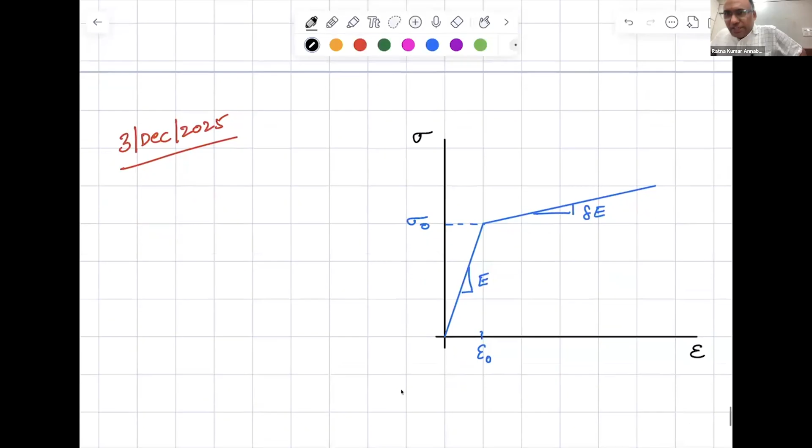Okay, so now yesterday we were looking at this elastic linear hardening model, right?

Now, if you look at this, let us say you are talking about a stress at this point, the equation of line OAB. So equation of line AB can be written as sigma minus sigma naught divided by epsilon minus epsilon naught is equal to delta times E.

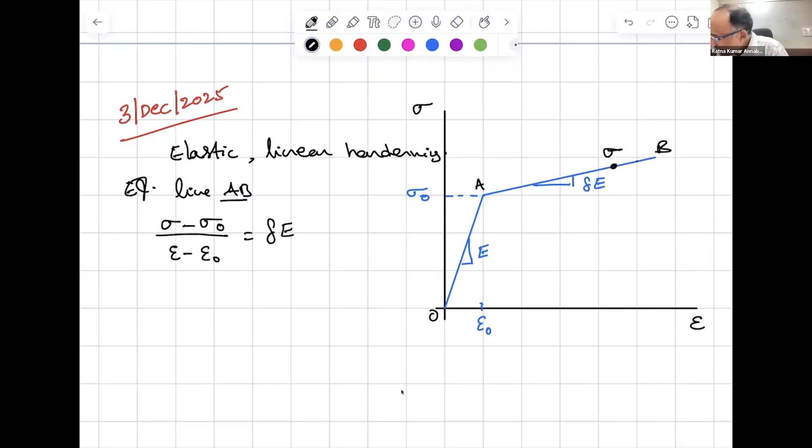What this delta is, some constant between 0 and 1. If it is 0, then this slant line will be elastic perfectly plastic. So it will be less than 1 because the slope, if it is equal to 1, then this will be, sorry.

If it is equal to 1, so this will be 0 comma 1, less than 1, the delta value. If it is equal to 1, it will be same as E. If it is less than 1, so you can see that the slope of this line is smaller than E. That is why it is delta times E.

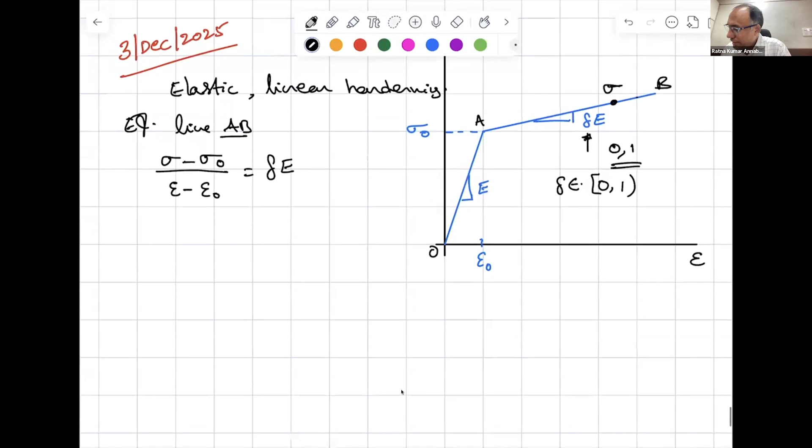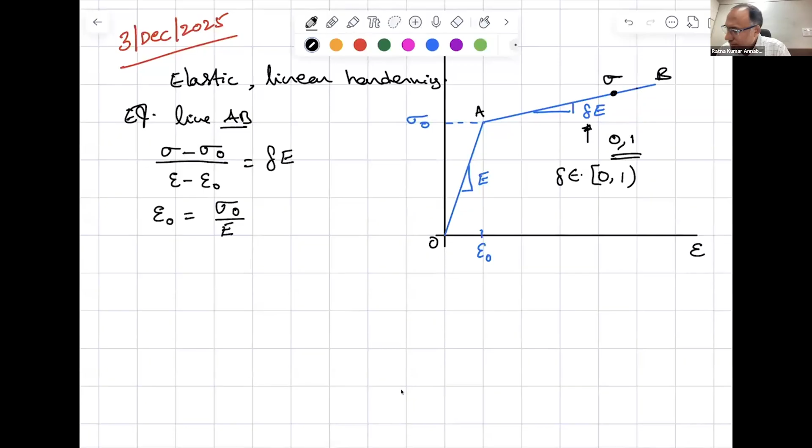Okay, now you can write this relationship as, you can also write epsilon naught is equal to sigma naught by E. Can I do that? Because this is my epsilon naught.

Now, if you have to write the generic expression for the constitutive relation, I can write sigma is equal to E times epsilon if sigma is less than or equal to sigma naught. And now I have to write sigma if sigma is greater than or equal to sigma naught.

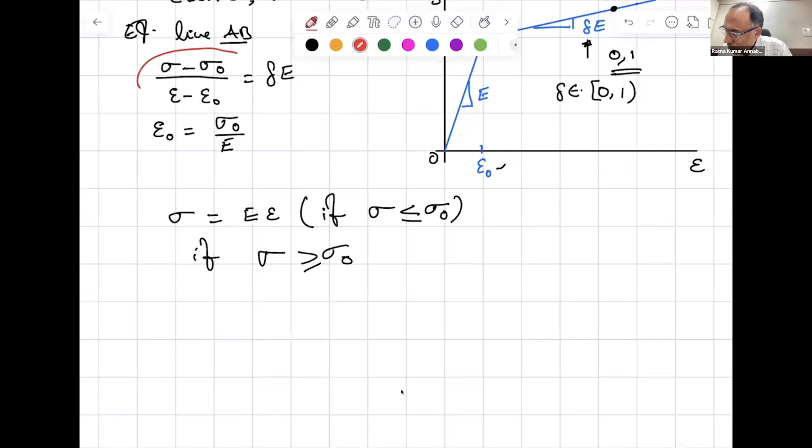This is what is to be satisfied. So sigma minus sigma naught is equal to delta E times epsilon minus epsilon naught. Can I do that? That implies sigma is equal to sigma naught plus delta E times epsilon minus delta E times epsilon naught. And what is E times epsilon naught? E times epsilon naught is sigma naught.

So that can be written as sigma naught into 1 minus delta plus delta E times epsilon. That is my stress if sigma is greater than or equal to sigma naught. Right? There are two conditions.

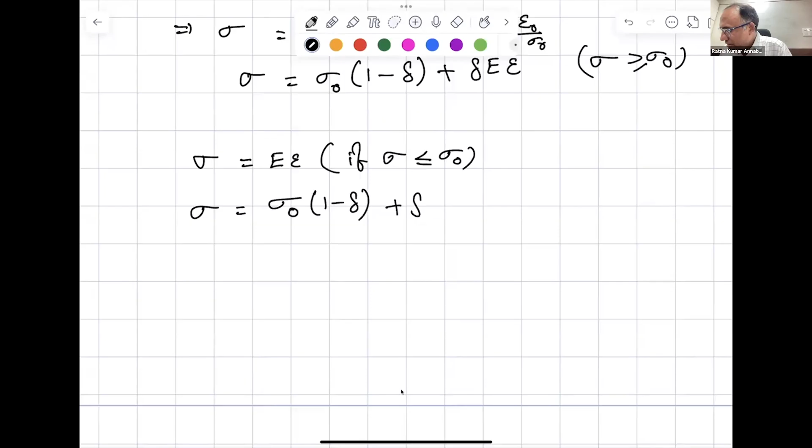So I can now put them together. Sigma is equal to E times epsilon if sigma is less than or equal to sigma naught. Sigma is equal to sigma naught into 1 minus delta plus delta E times epsilon if sigma is greater than or equal to sigma naught.

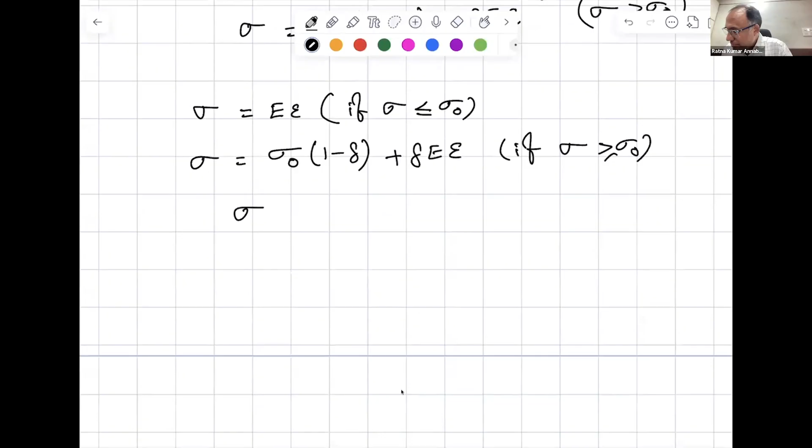And sometimes, as we have said, we will write the equation. You can write the constitutive relation as sigma as a function of epsilon, or epsilon as some function of sigma. Both of them are the constitutive relations that describe the behavior of the material.

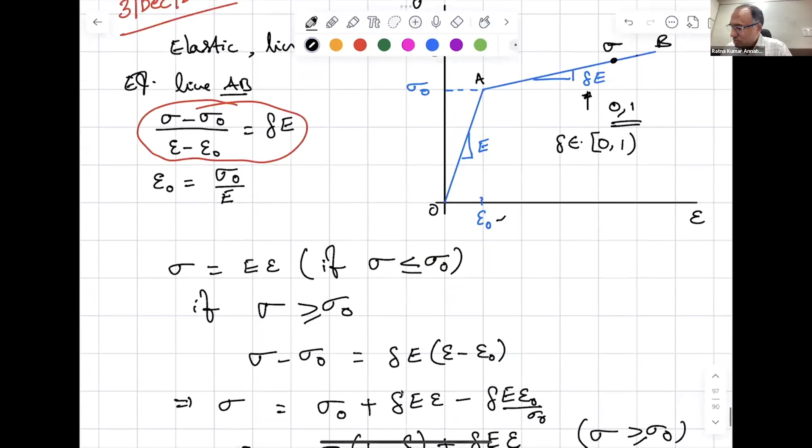So you can also write from this expression, sigma minus sigma naught by epsilon minus epsilon naught is equal to delta E. That implies epsilon minus epsilon naught is equal to sigma minus sigma naught by delta E. That implies epsilon is equal to epsilon naught plus sigma minus sigma naught by delta E.

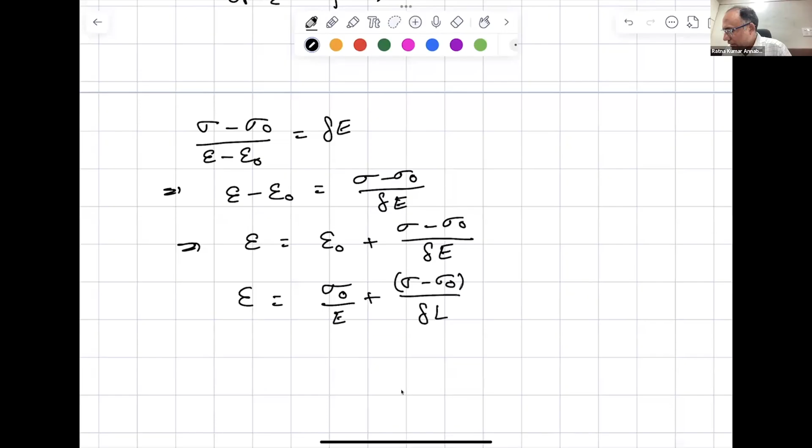But we know what epsilon naught is. Epsilon naught is sigma naught by E plus sigma minus sigma naught by delta E. Now, if you look at this equation, this is like I am writing epsilon as a function of sigma. If you look at these two equations, then I am writing sigma as a function of epsilon. They are interchangeable, completely interchangeable.

I think yesterday we had difficulty seeing how this equation has come about, right? Is that clear now?

Sir, one follow-up question. In the sigma equation, instead of sigma naught, since we are writing it in terms of epsilon, should we need to substitute for sigma naught in terms of E epsilon?

But sigma naught is a material property, right? Sigma naught and E are material properties, they are constants for your material. You could write, say, sigma naught is equal to E times epsilon naught. Again, epsilon naught is what? It is not epsilon, right? It is yield strain.

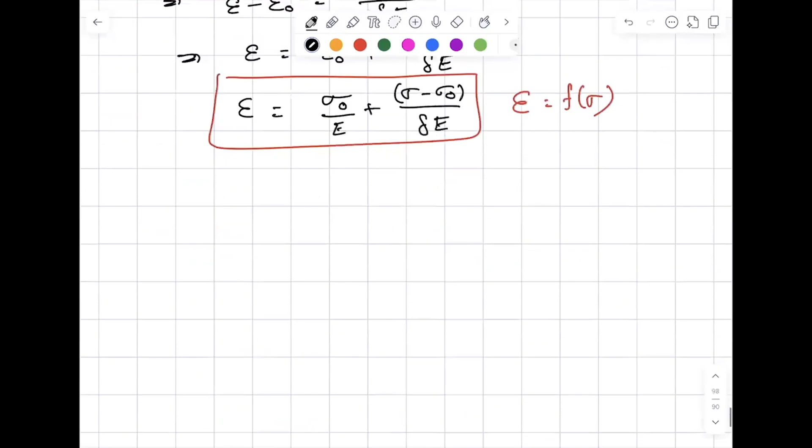If you slightly go up, can you slightly go up, sir? No, sir, slightly come down, sir.

Here, sigma is equal to sigma naught into 1 minus delta plus delta E into epsilon. We are converting epsilon naught to epsilon. How is it happening, sir?

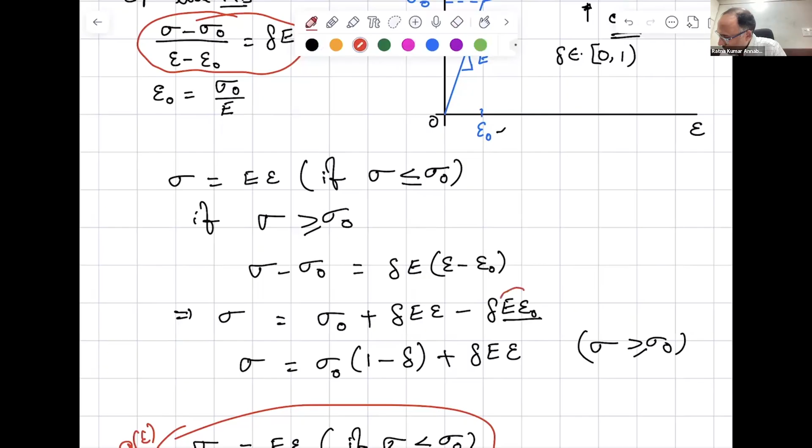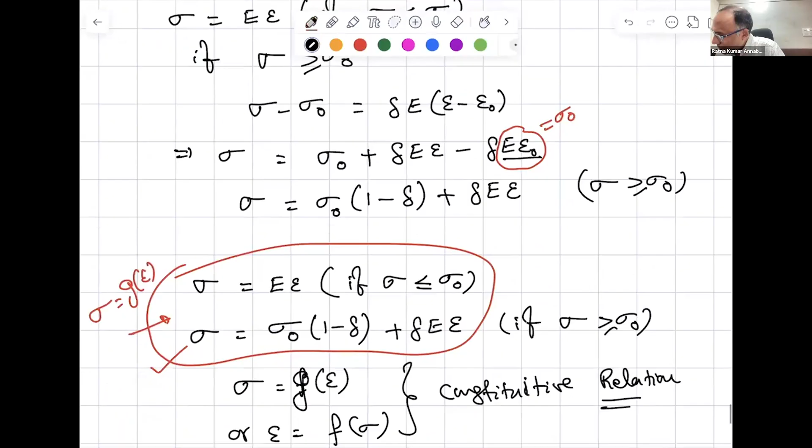No, I am not converting epsilon naught to epsilon. I am saying this quantity E times epsilon naught is equal to sigma naught. If I do that, then what do I have? I have skipped one step in between, so let me do that step also.

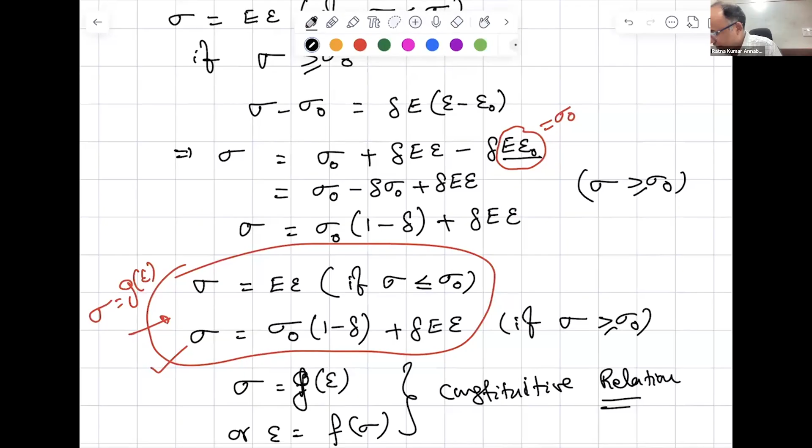Then that is equal to sigma naught minus delta sigma naught plus delta E epsilon. Oh, okay. Got it, that step I missed. I did not write it, that's all.

All right, so now we will move on to where we discussed yesterday.

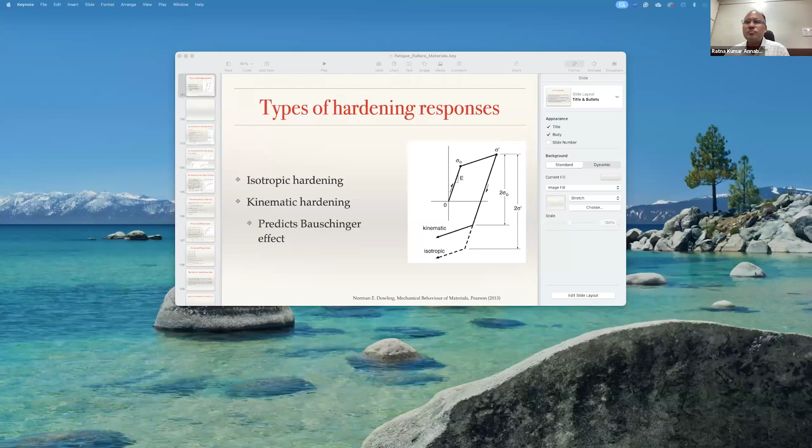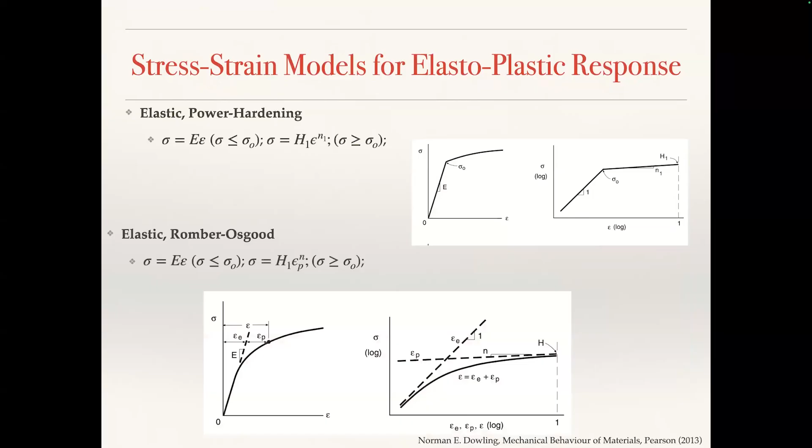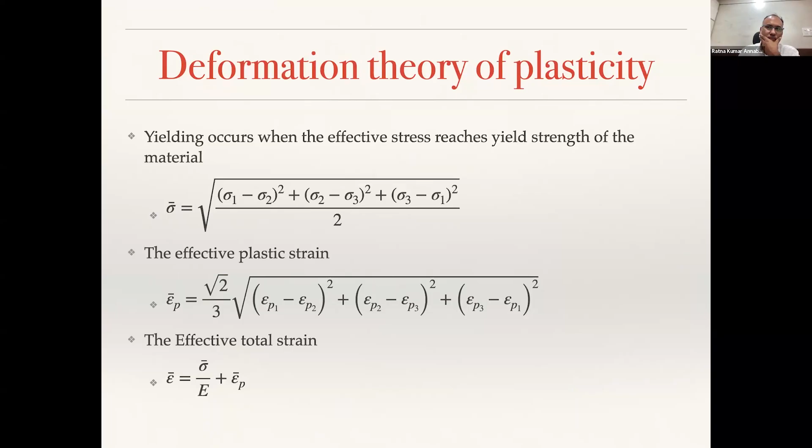Yes, sir. So all this we have discussed in the last class, and then I have talked about the effective strain. Is everyone following that? Are there any questions? Sir, we can follow, sir.

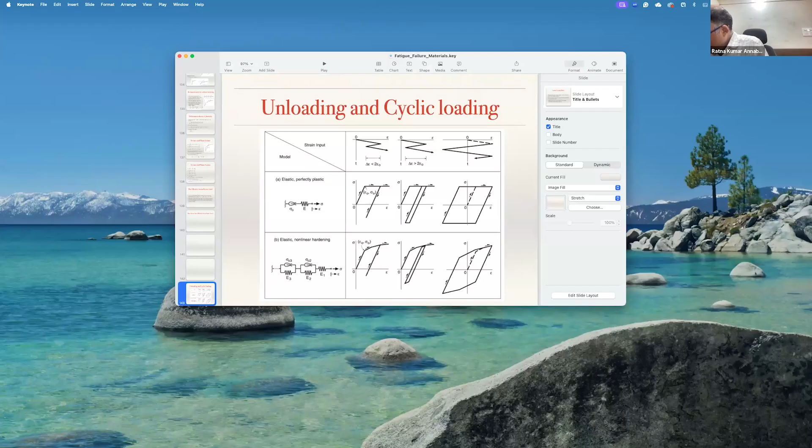Yeah, so all that we have done, and we have also looked at the case of plane stress. Now let us look at the idea of... one minute, I don't know why. Maybe I'll show it from my side. I'll share my screen. Okay.

So now I am going to talk about unloading cyclic loading. If you look at this particular figure, we are doing strain control loading. And if it is an elastic perfectly plastic material, and an elastic nonlinear hardening material, it's sequentially piecewise linear, but it's a nonlinear response. Now on the top, you are showing the strain input.

Let us say you have loaded the material in positive strain, and then you are unloading. That means as a function of time, the strain is increasing up to a maximum value, and then again it is unloaded, meaning the strain is reduced. When it is completely unloaded, it will go to zero, but here it is only partially unloaded.

If the partial unloading, that means delta epsilon, is less than 2 times epsilon naught. What is epsilon naught? For example, if you take this material and load beyond this point - if it's elastic perfectly plastic, let's say this is epsilon naught, sigma naught, that is your yield point. If you have loaded up to some strain corresponding to this point, it has actually yielded.

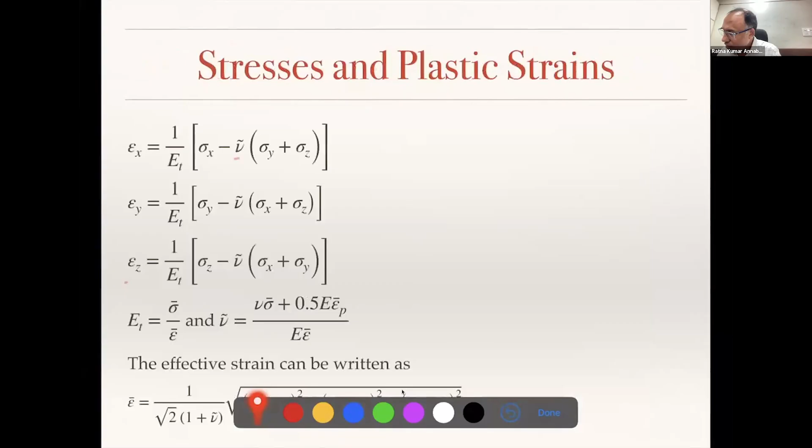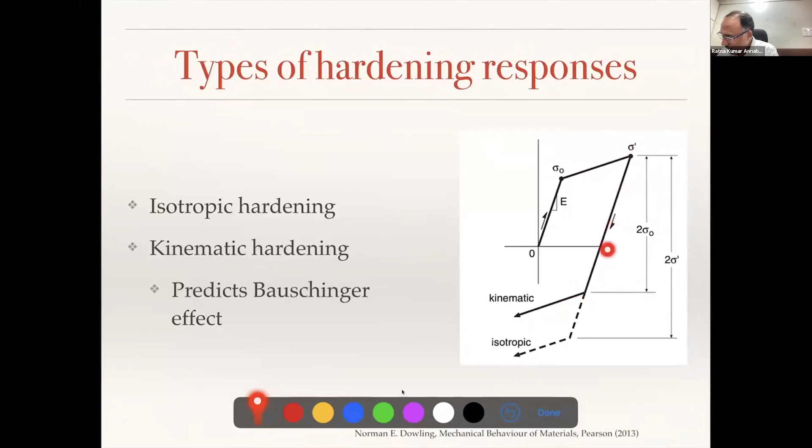So 2 times epsilon naught - if you remember our idea of unloading - when sigma is unloaded, if the change in sigma is less than 2 times sigma naught, yielding will not occur. Only when it is beyond 2 times sigma naught does the kinematic hardening occur in the reverse direction. Otherwise, if you have unloaded up to here and then reload, it will go back along the same path.

So the same thing we are trying to do here - it's like what you'd see in stress. Let's say this is time, that is strain. You have increased strain up to some value, and normally if you reduce and do the cycling like that, this is repeated loading. But in this case, instead of completely cycling, it went up to this value and then unloaded only up to this point, then reloading again.

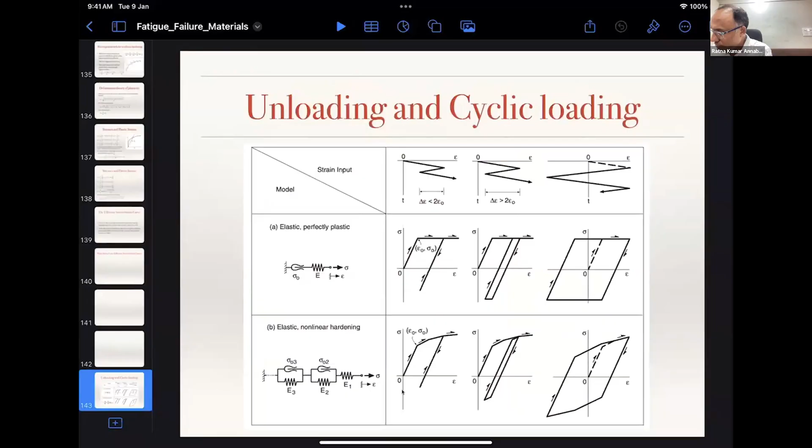So during unloading, if you go to a certain value such that delta epsilon is less than 2 epsilon naught, that means you are not initiating any plastic deformation. Hence when you unload and then reload, the path will be completely elastic. Is this point clear?

Because in the reverse direction, yielding happens only when the change in stress value is greater than 2 times sigma naught, or in terms of strain, 2 times epsilon naught. But if it is less than 2 times epsilon naught, then it will not plastically deform in the reverse direction. As a result, there will not be any plastic deformation during this process, and hence if you reload it, it will follow the same elastic path.

Now let us look at this scenario. Here, what we have done is loaded and unloaded to a value where delta epsilon - the distance from here to here - is greater than 2 times epsilon naught. This is where yielding starts, but your strain reduction has gone from this point up to here.

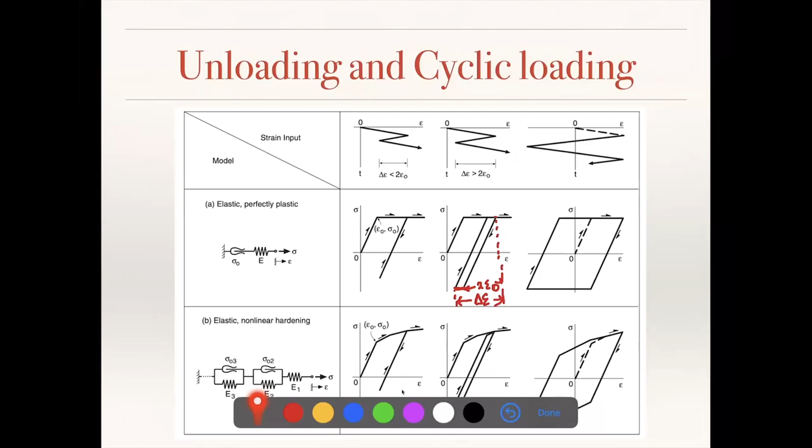And then again, you are reloading. So when you are reloading, you will go and then trace the same path. So this is initially there is no loading. When you want to do the cycle between plus epsilon and minus epsilon, first you have to go from 0 to plus epsilon. That is this path. After that, you are cycling between them, and hence you will continue to do this many times. Okay, this happens when it is elastic, perfectly plastic.

But now, if you have a nonlinear hardening model, what you will have is up to epsilon naught, there will be elastic deformation, and then you have plastic deformation. And again, if you take the same strain cycling, it will unload, but even before it reaches plastic deformation, you are reloading, so that it will be elastic. So here it is non-hardening, that is why it will be a straight line, horizontal line. Because it is hardening, it follows the hardening law, depending upon sigma naught 3 and sigma naught 2 and so on, depending on the material property.

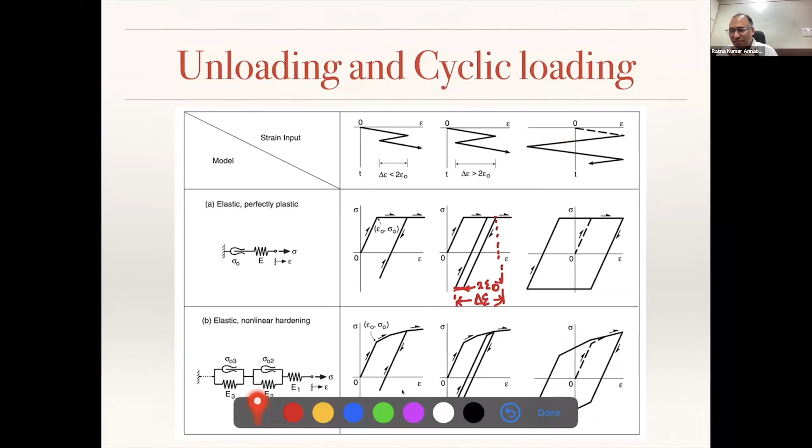Now we are coming slowly to fatigue loading. Imagine how many cycles of loading that you are doing, how the life changes is what we wanted to understand. But in order to understand, we need to first understand the stress strain response when you do the cyclic loading.

So before that, we will try to understand the cyclic stress strain behavior. Let us say you have a component. Here we are doing a controlled constant strain cycling. What is the meaning of that? You are cycling between, you are going from 0 to say epsilon B and epsilon B to this point. Let us call this as point E, right?

So you initially loaded the specimen up to this strain. Now you are unloading between this epsilon max and epsilon min. These are the strain range. From this strain to that strain, you are cycling.

This is what we call constant strain cycling. You will do this cycling and realize why it is happening: as far as the Bauschinger effect is concerned, your yielding happens at a point C much before point A, which is your yield point. It continues because you are loading in the compressive regime. Then it's fully reversed loading in some sense, because epsilon min equals epsilon max in magnitude.

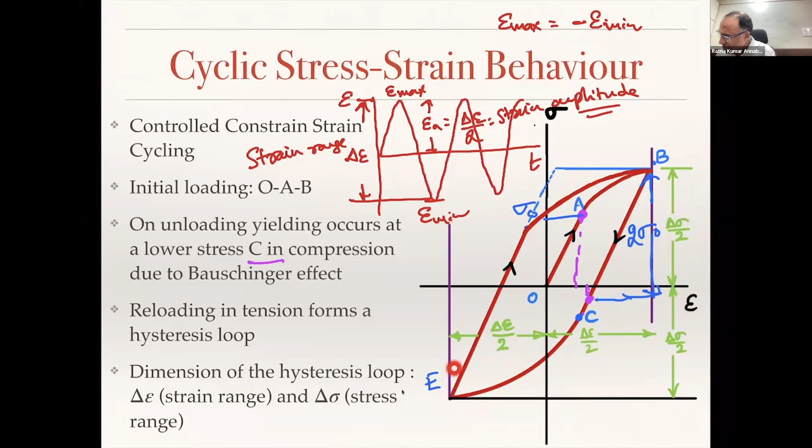Here, is it a fully reversed loading or not? This is fully reversed loading because epsilon min equals minus epsilon max. And you can see that the stress is varying from minus delta sigma by 2 to delta sigma by 2. The stress range is this and strain range is that. So the dimension of the hysteresis loop is delta epsilon and delta sigma - that represents the dimension of the hysteresis loop.

So this is how it works. Now, if you look at this, this is how the hysteresis loop we are talking about looks. This is the total strain range for a corresponding stress range - total stress range, corresponding strain range - and this is what we call the total strain range.

If delta epsilon can be decomposed into two parts: elastic strain range and plastic strain range. Elastic strain range is given by delta sigma by E, because this is when you are unloading - this is the recovery of the elastic strain. So that's why you take the slope and that is your elastic strain range, and this is your plastic strain range.

Sir, one small question here - the curve, as I cycle in the fatigue actually, due to Bauschinger effect, you are not going to have the same curve, right? It will be shifting, right, because the yield point is going... That we will talk about.

That happens because of the reverse yielding, because of the dislocations I told you yesterday. Then after some time, what happens is you will see that this curve, if you continue to repeat, it will not follow the same path. But after several cycles, what happens is it saturates. We will see that in the coming slides.

Okay, the curve here is only for one cycle, right, or... If I have drawn it for one cycle, you can assume that it is drawn after reaching saturation. Okay, got it sir, got it.

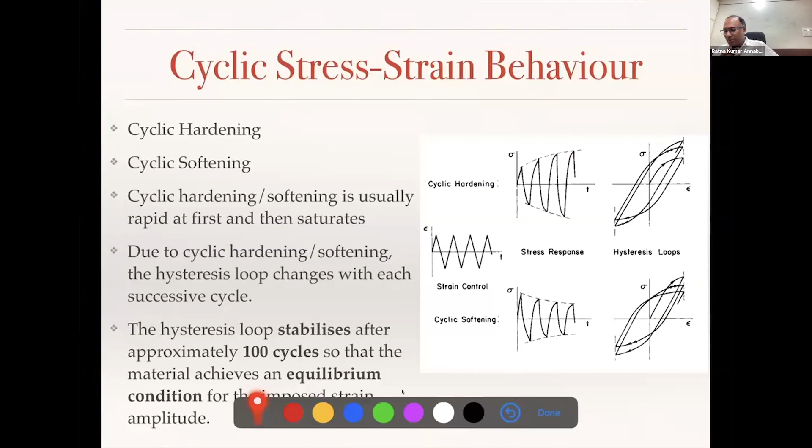Both of them show a hysteresis loop, but there will be cyclic hardening or cyclic softening. But these hysteresis loops, after so many cycles—say 100 cycles—the system achieves an equilibrium, and then there won't be any change in the cycle. So they will all reach some certain equilibrium.

So whatever curve I have drawn here can be seen as a saturated curve.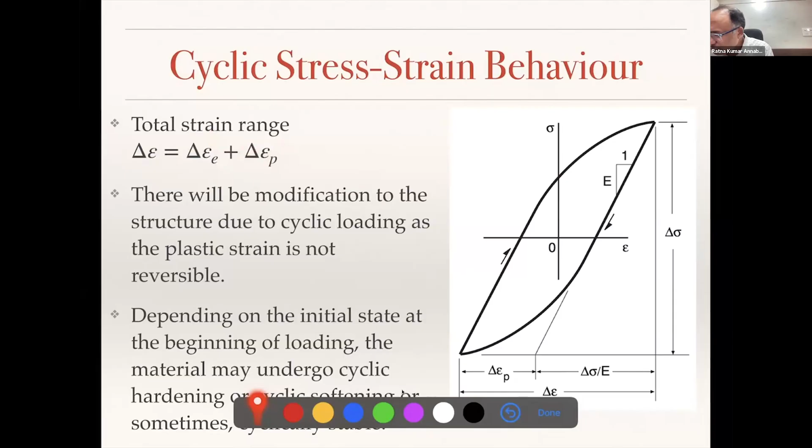Now, when I talk about delta epsilon, that is total strain range, it can be seen as elastic strain range plus plastic strain range. But normally we don't work with strain ranges or stress ranges in the stress-life approach; we work with stress amplitude. Similarly here, instead of working with strain range, we can work with strain amplitude, which is nothing but strain range divided by 2. So I am dividing this entire equation by 2. Then delta epsilon by 2, which I am calling strain amplitude or epsilon A, is equal to delta sigma by 2, which is stress amplitude, divided by E, plus delta epsilon P by 2, which is the plastic strain amplitude.

So for many materials, if you look at this stable hysteresis loop after so many cycles, it is usually symmetric in tension and compression for metals. But for some materials which have extremely high fracture strength in compression compared to tension, such as gray cast iron, this can be asymmetric. It is not necessary that it should always be symmetric, but for most metals, the hysteresis loop, once saturated, will be mostly symmetric in tension and compression.

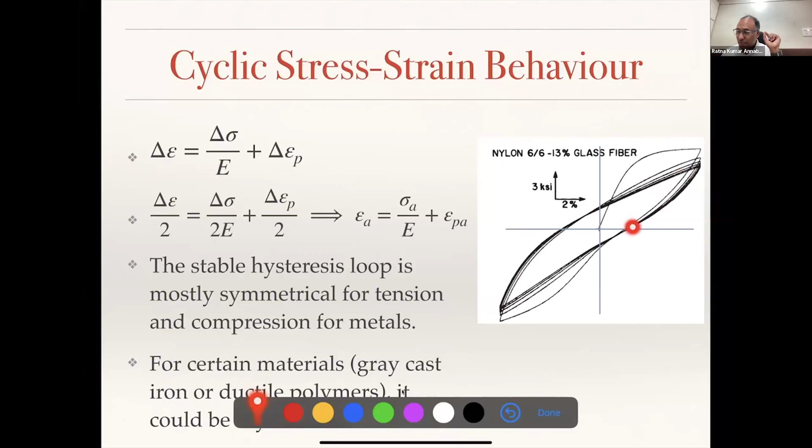So now, if you would plot, for a given strain amplitude, the stress-strain curve, after some time it will reach saturation—let's say something like that—you will have a saturated hysteresis loop. This is for one specific strain amplitude. So if you do this, this line is for a particular strain amplitude, this loop; similarly this loop is for another strain amplitude. Like that, you plot these loops for different strain amplitudes.

Now, if you connect the lines passing through these peaks, these junctions where the reversals are happening, both in tension and compression, that line passing through origin O, A, B, C, D, E—this line is what we call the cyclic stress-strain curve. Whenever people talk about the cyclic stress-strain curve, it is actually a stress-strain curve obtained by plotting the line joining the peaks of the hysteresis loops, the stress reversal or strain reversal points, for different strain amplitudes. Is that clear how we got this curve?

For example, if you take a material, you start from zero strain and go to maximum strain here and minimum strain here. That particular loop, what we call a hysteresis loop, is for a particular strain amplitude. If you increase the strain amplitude of the same material, it will go to B, so OADA is for one particular strain amplitude, OBEB is for another strain amplitude.

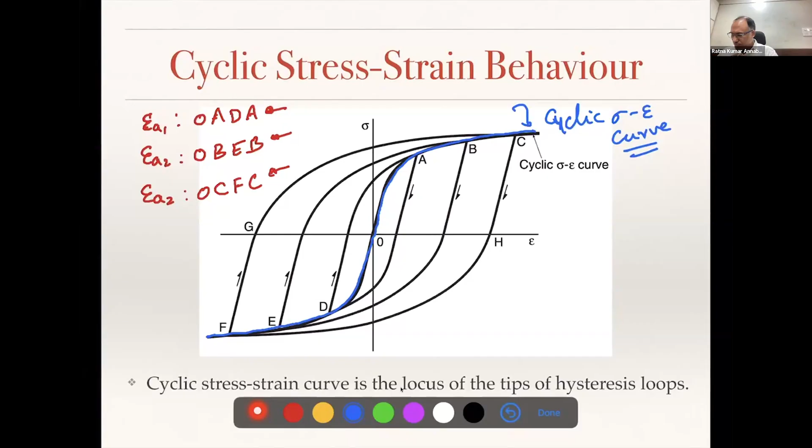Is that clear? Sir, one small question here. For the first cycle, it will pass through O, but for the second cycle, it's not going to pass through O, right? No, I am doing 3 different experiments. If I am doing the first experiment with epsilon A1 as my strain amplitude. Got it, sir, got it. Now I got it.

Any other questions? All right.

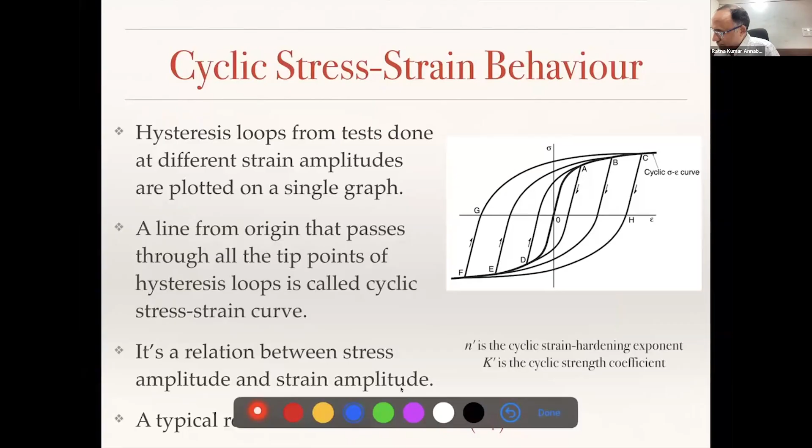So this cyclic stress strain curve can be represented using a constitutive relation like this, and you can write it in terms of strain amplitude instead of strain range. Here n dash, the 1 by n dash term, is going to vary between 0.1 and 0.2.

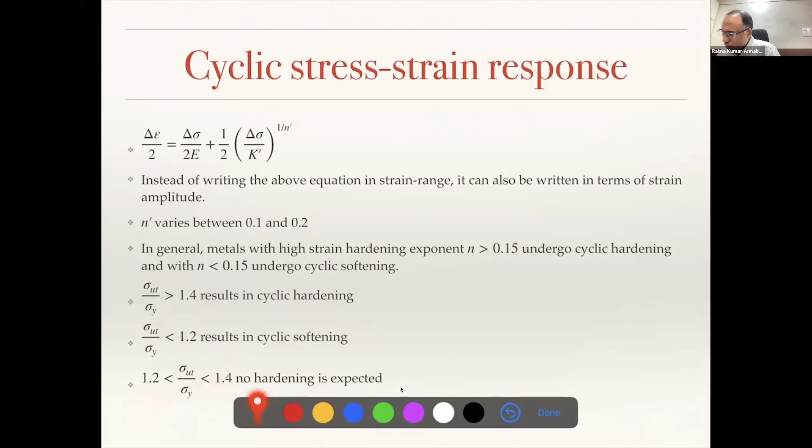Generally for metals with high strain hardening exponent, n greater than 0.15, they undergo cyclic hardening, and with less than 0.15, they undergo cyclic softening. Or if you know the ultimate strength and yield strength of the material, if that ratio is greater than 1.4, it results in hardening; less than 1.2, softening; if it is between 1.2 and 1.4, neither hardening nor softening is expected.

So if you look typically at cyclic hardening materials, this is 2024, these are different material systems. For this particular material, you can see this is uniaxial monotonic loading. But if you do cyclic loading, the cyclic loading curve is above the monotonic loading curve, which means it is a cyclically hardening material.

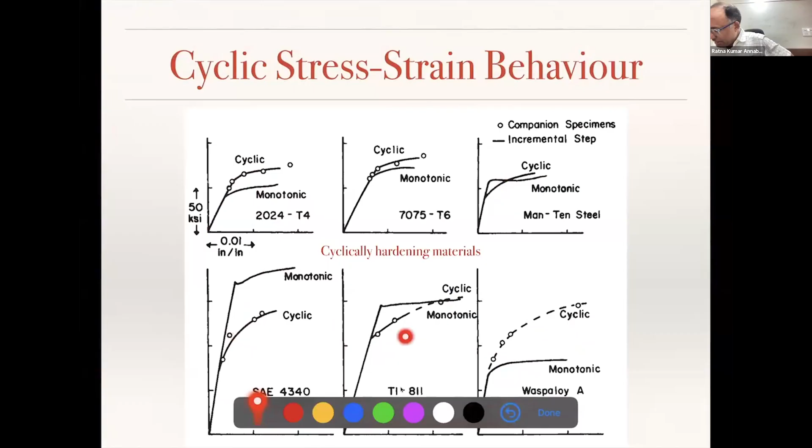All these are cyclically hardening materials, whereas the figures on the bottom are cyclically softening materials. This one is also cyclically hardening, but these are cyclically softening. So these kinds of materials do exist in nature.

Now, so what did we understand until now? Whenever you are doing cyclic loading under plastic deformation - because when it is elastic deformation, no problem, the path traced is the same - the problem comes only with plastic deformation. Under plastic deformation, if you are doing stress or strain reversal, the plastic deformation happens at different points in tension and compression.

And now you are operating between a certain strain range, and the question is how do we assess fatigue life. If the strain range delta epsilon you're operating is much larger than 2 times epsilon naught, or the corresponding stress range is larger than 2 times sigma y, in those scenarios you need to worry about how it's going to work. This is what we call low cycle fatigue, because strains are much larger, or stresses are much beyond yield strength, and hence you need to apply the low cycle fatigue approach.

This is typically the case for several components in nuclear pressure vessels, because the loads they are exposed to are much larger, steam turbines, and aerospace components. They usually operate at very high stresses with potential plastic deformation.

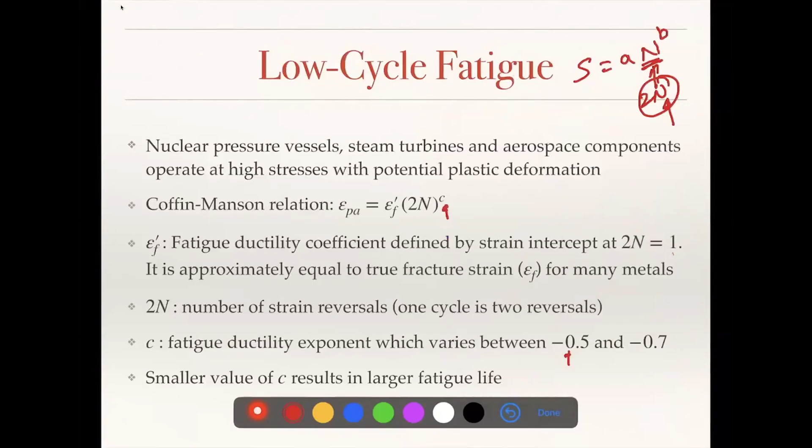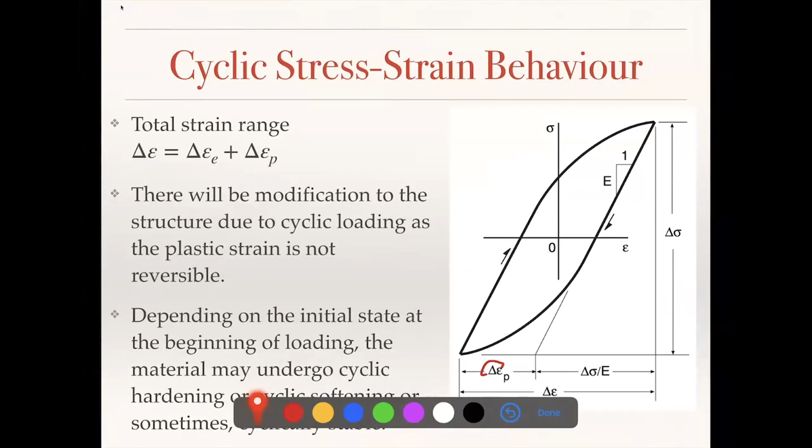That is what your plastic strain amplitude is. If you note down this figure, this gives you the plastic strain range. Divided by 2 is your plastic strain amplitude, delta epsilon P. This is the plastic strain range; divided by 2 will be the plastic strain amplitude, epsilon PA. Can I go to the actual system? Here this slope is E because it's elastic unloading.

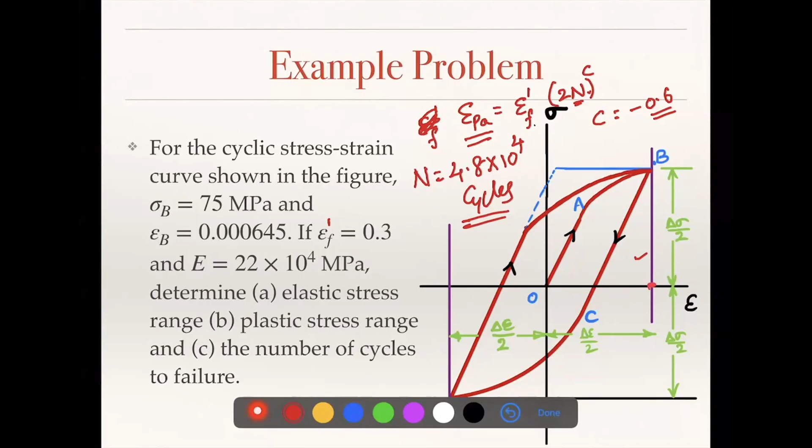You're able to see the screen, right? With the writing pad? Yes, sir.

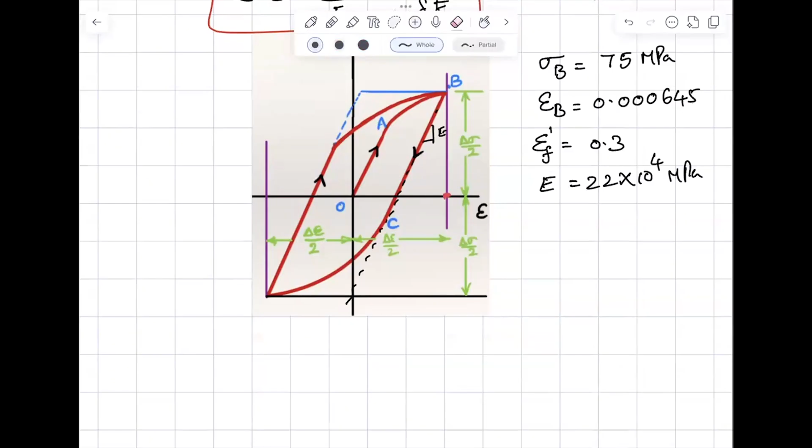So here we are saying sigma B is equal to 75 MPa. Epsilon B is 0.000645. Epsilon F dash is 0.3. And E is 22 into 10 power 4 MPa. Correct? So this is my E, because that is the elastic one. So if I go like that, and this is my...

Delta epsilon elastic, that is my delta epsilon plastic, correct? So how do I find delta epsilon elastic? It is equal to delta sigma by E. Can I do that? Delta sigma is 150 divided by 22 into 10 power 4. Correct?

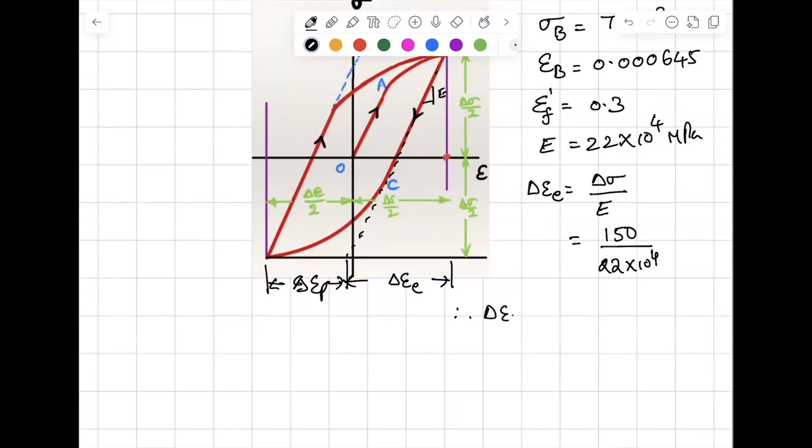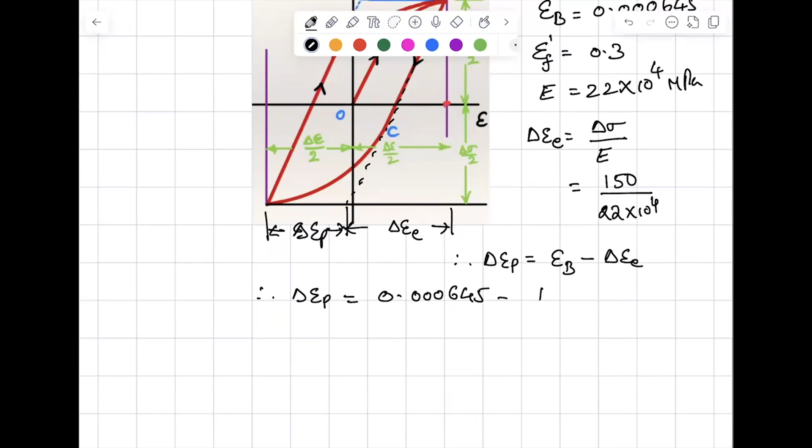Therefore, delta epsilon P is equal to epsilon B minus delta epsilon E. Therefore delta epsilon P is equal to epsilon B, 0.000645, minus 150 by 22 into 10 power 4. What is that value?

What is that value? 5.768 into 10 power minus 3. Therefore, epsilon PA, plastic strain amplitude, will be 5.768 divided by 2, which is 2.884 into 10 power minus 3.

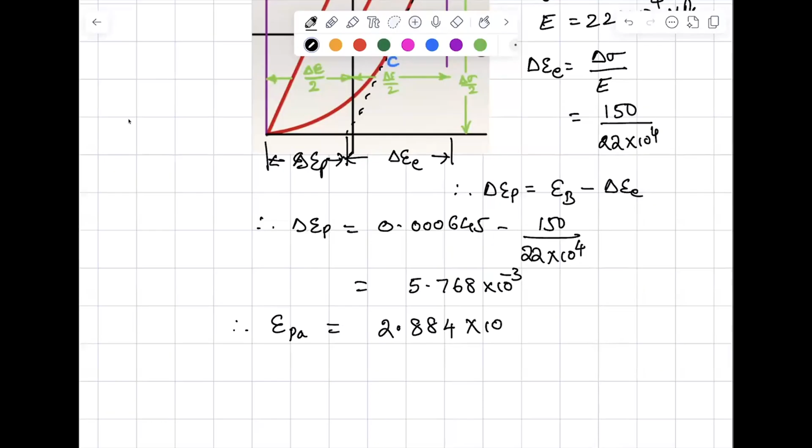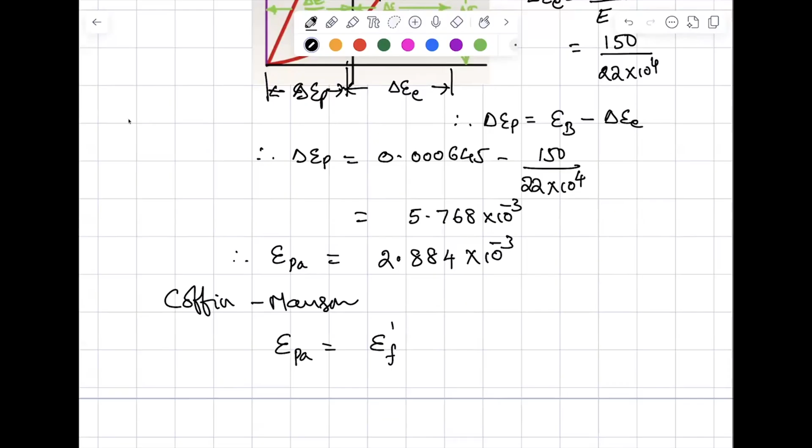I'm getting a negative value. Yeah, negative, but we can take it as positive because it's the amplitude only, no? Yeah, okay. 10 power minus 4, sorry minus 5. Yeah, minus 5. Minus 5, huh? Yes sir. That is 1.841 into 10 power minus 5, isn't it?

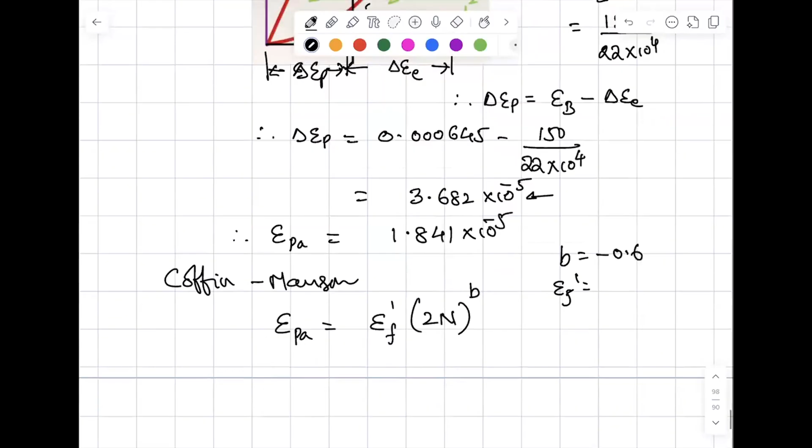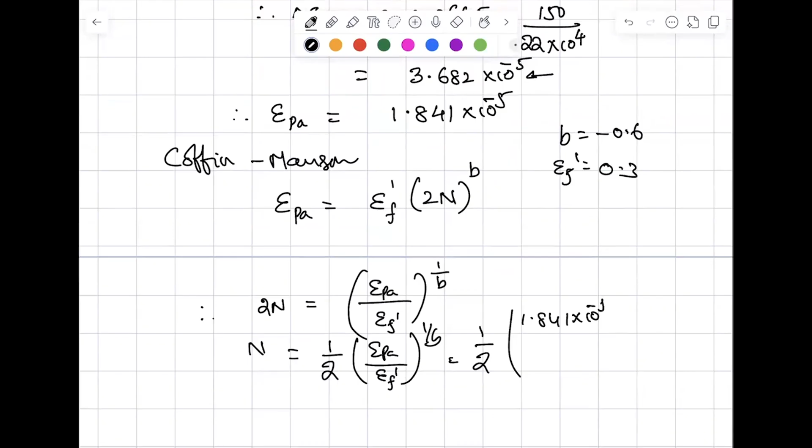Correct? And I asked you to take B equal to minus 0.6. Yes, Epsilon F dash is given as 0.3. Therefore, 2 times N is equal to epsilon PA by epsilon F dash, whole to the power 1 over B, or N is equal to 1 by 2 times epsilon PA divided by epsilon F dash, whole power 1 over B. That is equal to 1 by 2. Epsilon PA is 1.841 into 10 power minus 5. Epsilon F dash is 0.3, whole power minus 1 by 0.6. What is that value? Divided by 0.3.

Into 10 power 6, sorry, how much? 5.24 into 10 power 6. Same only, sir. That's what you told earlier, no? Yes sir, yes, correct sir. 4.8. So this is the number of cycles to failure.

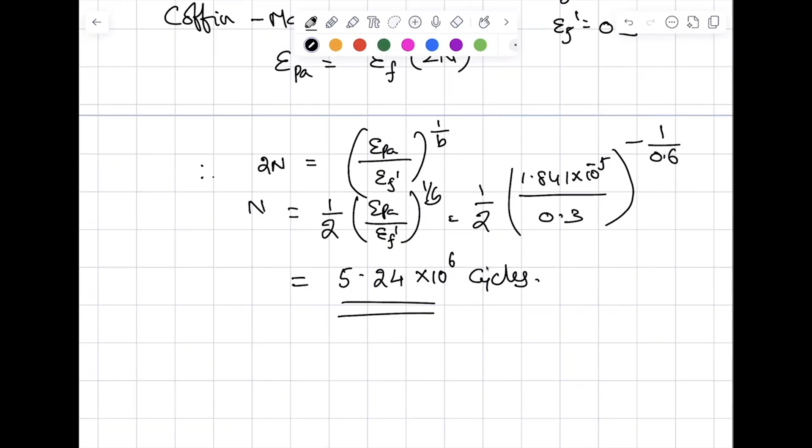So whenever you want to get the number of cycles to failure in the case of strain-controlled loading, for example in low cycle fatigue, you use Coffin-Manson. Coffin-Manson is one of such relations. Again, here we are not talking about mean strain at all. Mean plastic strain is 0, isn't it? So that one needs to take into consideration. That is, it does not account for mean plastic strain or mean strain amplitude. When the mean strain comes into picture, you need to use other models.

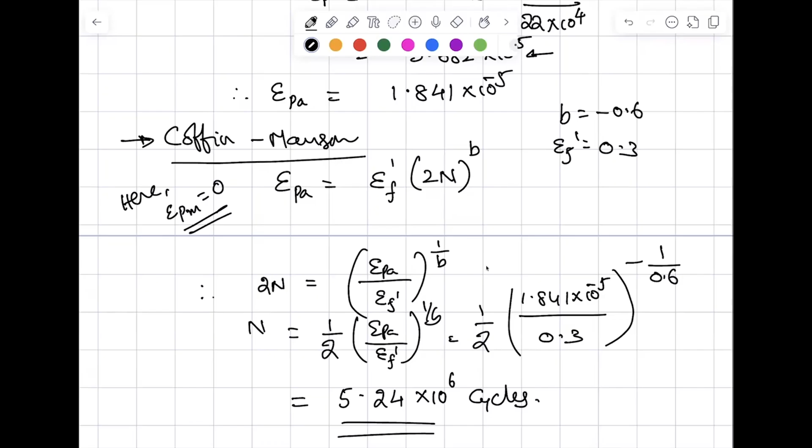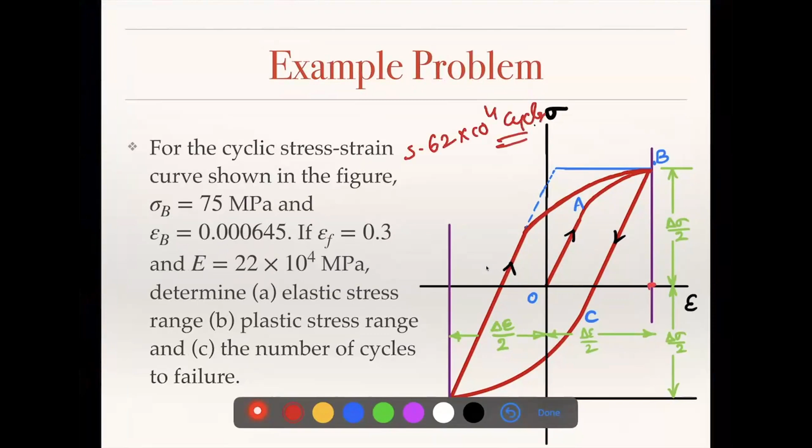Okay. So the answer is 5 point... Now, so this is your strain-life approach.

There is also other models, like the Coffin-Manson relation, where if strain amplitude is given by sigma F dash by E into 2NF power B, because the total strain amplitude—earlier you have only plastic strain amplitude, but the elastic strain amplitude can actually be represented by our stress-life approach. So if you look at that, this can be written as sigma A by E plus sigma A by H dash into whole power 1 by N dash, because epsilon plastic strain can be represented by this.

So your strain amplitude, stress amplitude, can be represented by S is equal to AN power B. Here A is sigma F dash, N is 2 times NF power B. So this is also one of the relations. You can also use in this place AN power B plus this, your Coffin-Manson relation, right?

So when you have to consider the total strain amplitude, you have to take the elastic part as well as the plastic part. And if you look carefully at this figure, this is the strain amplitude and number of cycles to failure. If you take the elastic part, that will be sigma F dash by E, and the plastic part is given by this line. This is a log plot, and the total is given by this curve. You see that here there is a large strain amplitude, right? Because the strain amplitude is higher, hence life will be smaller. If the strain amplitude is smaller, the life will be larger.

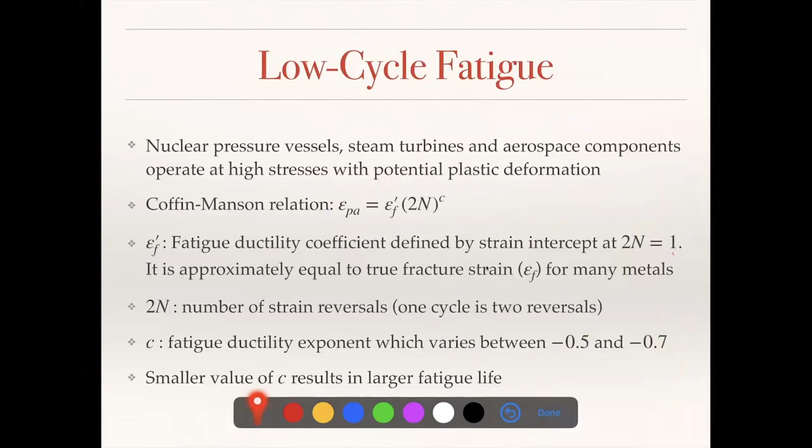So this is a complete picture. Earlier, what we have done is only taken the Coffin-Manson relation, which relates only to plastic strain amplitude. But in reality, you will have both. And when comparing, if the relative fraction of this is much smaller than that, then only Coffin-Manson relation is okay. Otherwise, you take into account a hybrid approach where the elastic part is dealt with as S equal to N power B, and the plastic part is dealt with as Coffin-Manson relation. The sum total of that will be your actual strain-life diagram—strain amplitude on the y-axis, life on the x-axis. This is what we call the strain-life diagram.

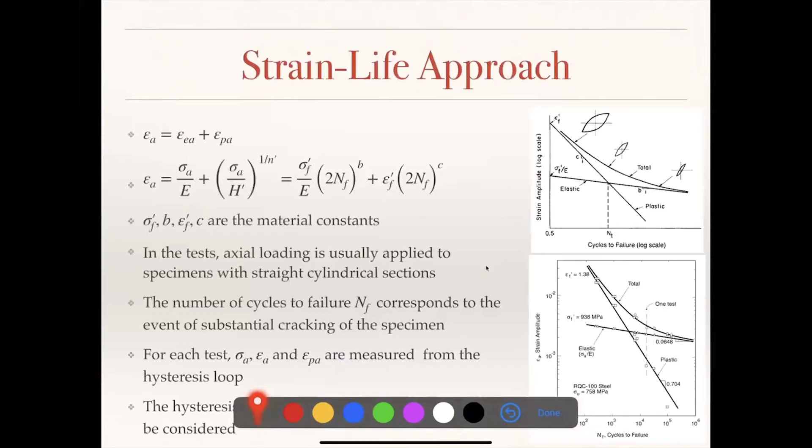So now you have a total strain amplitude, sigma A, stress amplitude. For the data shown in this figure, obtain the constants for the strain life curve. How will you do that? This is your strain life curve, and you need to fit this data to the strain life curve and then get the constants, like what we have done in the previous case. Any questions here? No, sir.

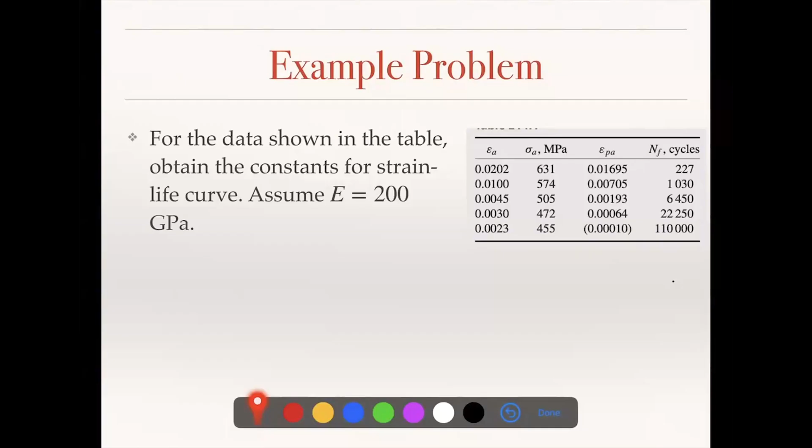So I'm not solving the problem. I would like you to try solving it yourself.

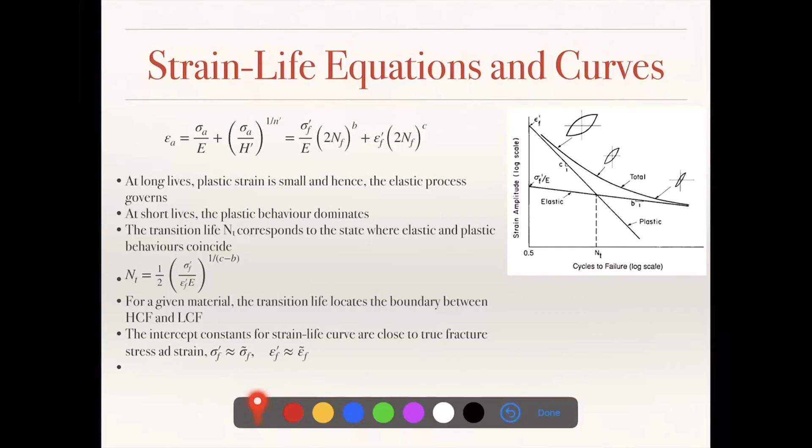The strain life curves that we have seen are not really sensitive to surface finish and residual stresses, unlike stress life curves. That is why in the case of stress life curves, we have several correction factors for surface finish, temperature, and all these things. For strain life curves, they are not sensitive to that, but size effects are a concern, meaning size factor is something that one needs to take into account. So the epsilon f dash that we are using should be accounted for with a size ratio depending upon the value of D. One needs to apply a size reduction factor called MD, and then apply sigma FD dash equals MD sigma F dash, and epsilon FD dash equals MD epsilon F dash. So the sigma F dash and epsilon F dash shown in these equations should be modified when there is a change in size.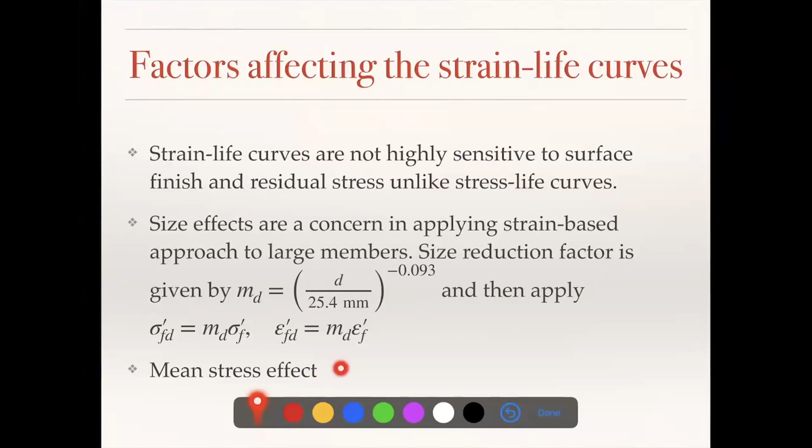And we also need to worry about the mean stress effect. This can be dealt with very similarly, and this is what we call Morrow's mean stress equation. When you have a mean stress effect, you can use Morrow's equation for mean stress, and that can be modified, giving you the equation you need to consider when there is a mean stress effect, wherein your mean stress comes in here. I think that is pretty much how you will deal with the strain life approach.

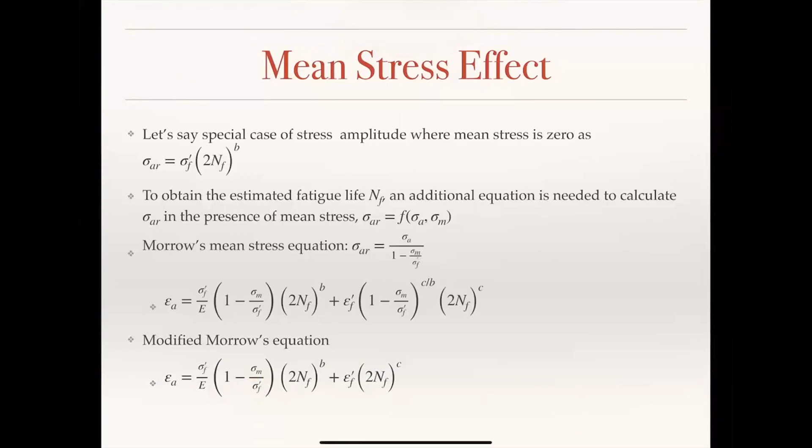I will give you certain assignments so that will prepare you to solve problems using the strain life approach. And next week, we will primarily focus on creep failure. Okay, sir. All right. Thank you. See you next week.